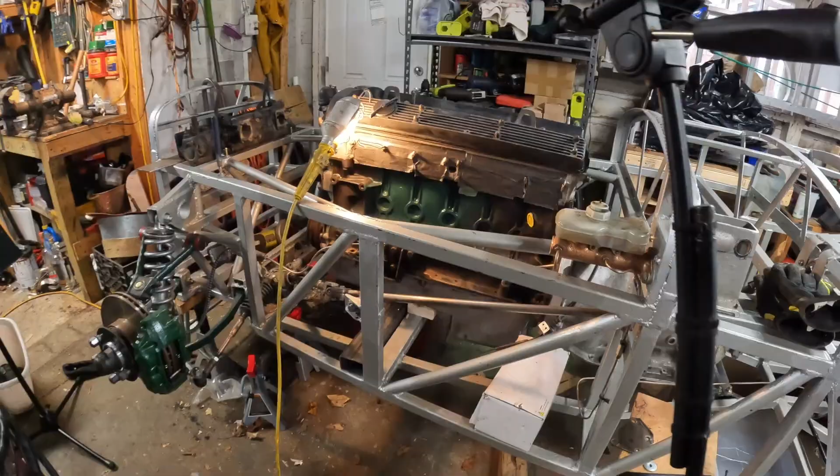What we're doing right now is we're taking a look at the original XJ6 engine mount and the position of the new cross member that's going to go in. As you can see, it's a little loose. Here's the original cross member that I designed in. When I initially put the engine in, the engine mount was directly over this.

Once I put the drive shaft in and realized I could just use that secondary half of the original XJ6 drive shaft without modifying it, being able to use that drive shaft means that the engine mount has been pushed forward approximately 2.5 to 3 inches from here to here. And so what I need to do is add some structure here so that I can build the engine mounts to attach to this.

And so what I'm going to do is effect that by the simple expedient of welding in this fantastic 2x3x120 wall rectangular tube, welded to these tubes here, and then it's going to get welded all the way along the length of the original cross member on the top edge and on the bottom edge down there.

There are some welds that I need to grind down and not only just rub the paint off for welding, but there are some welds I need to flatten out so that that new piece of rectangular tubing will mate flush up against the designed-in cross member, and then also sit square in the corners of the forward tubes as well.

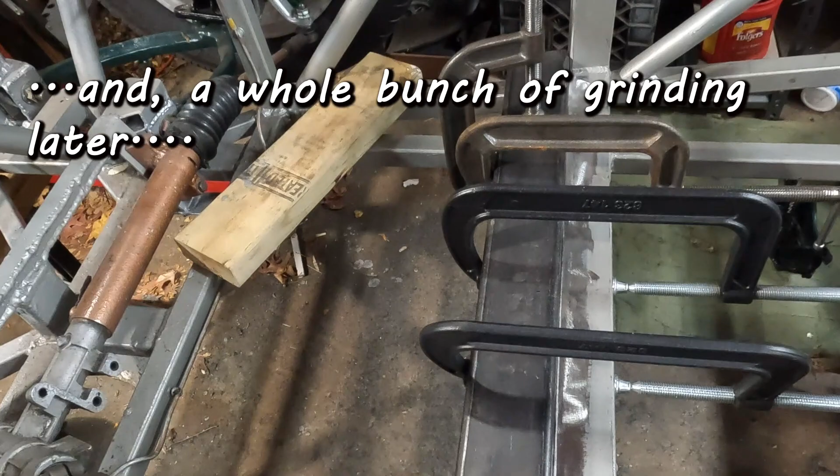As you can now see, the new cross member is clamped in place with all of my most heavy clamps. I beveled the ends to 8 degrees to match the angle of the chassis tube. The new cross member is ready for welding. Let's fire up the welder and make some sparks fly.

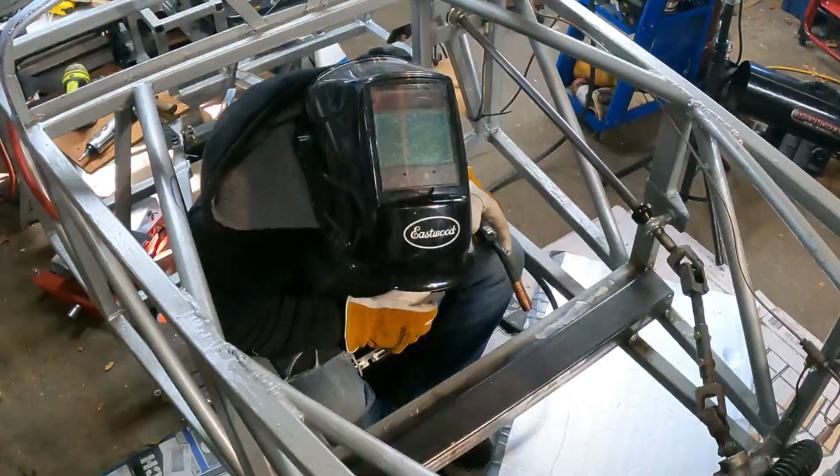Pretty good. So those welds look pretty good. I'm not too upset about them. There's a couple that are kind of blobby and hideous, but good thing they're on the bottom and nobody can see them.

So now I'm ready to move on to the next phase of the project, which is putting the engine and transmission back together with some finishing touches that I didn't do on the first pass when I was just placing it in there, and then build the engine mounts, and that's super exciting. So next phase.

Yeah, remember when I thought that 20 degrees was hardship conditions? It's a little colder than that today. Let's go fire up the jet engine heater and give that garage a warming. So we're out here in the garage. As you've seen, it is really blisteringly cold outside. And I've had the heater running in the garage for about, I want to say, an hour. And so it's not terrible out here. You can still see my breath, so it might be 40 degrees in here, even though it's like 9 degrees outside.

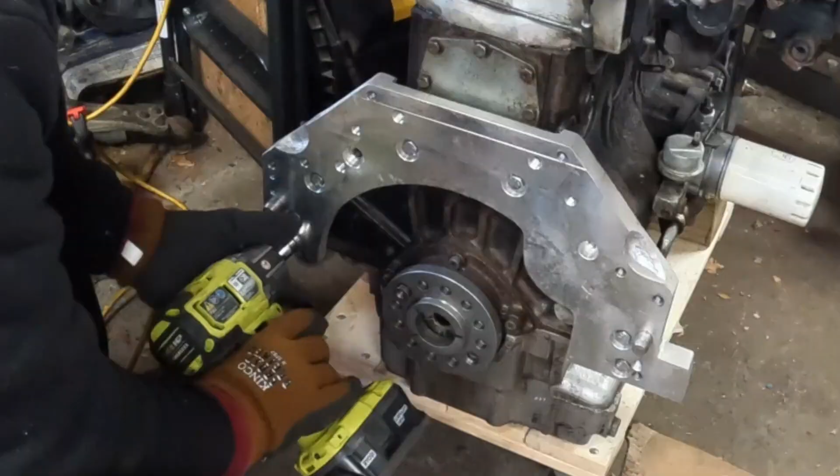But anyway, I have to torque all these fasteners, and you can see that I've taken the flex plate off because I want to clean out the threads, stick some blue Loctite in there, and then torque those to spec as well. So the first thing that I got to do is pull these bolts out. And clean out the threads. Apply some blue Loctite. And torque them into place.

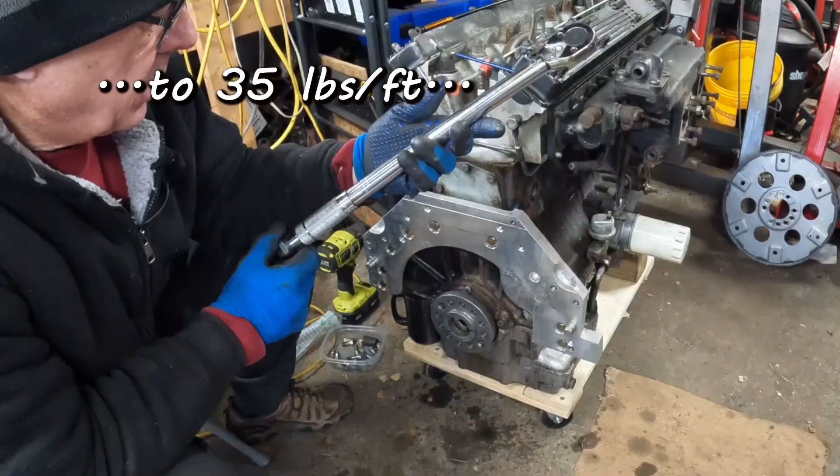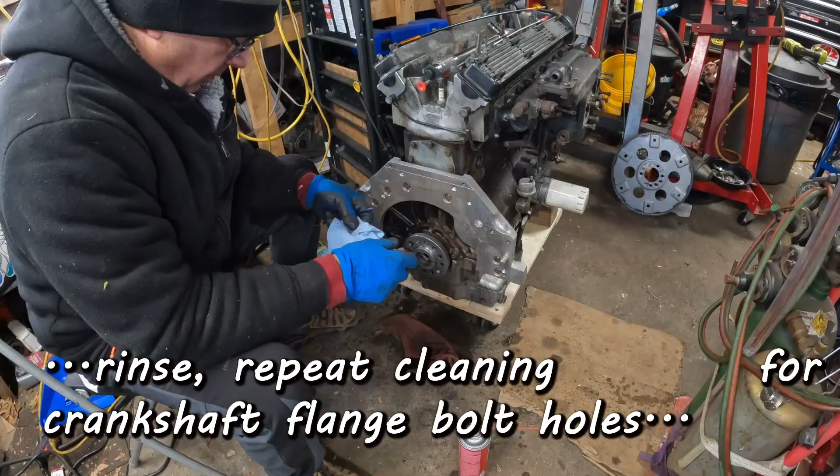There we go. Cool. All right, so the adapter plate is mounted in its final configuration. Right on. So the first thing that we got to put in, where did I put it? Oh, here it is. This right here is a locating dowel that went through the stock Jaguar flex plate into the crankshaft flange. And here on the John's adapter, there are two holes where these things go.

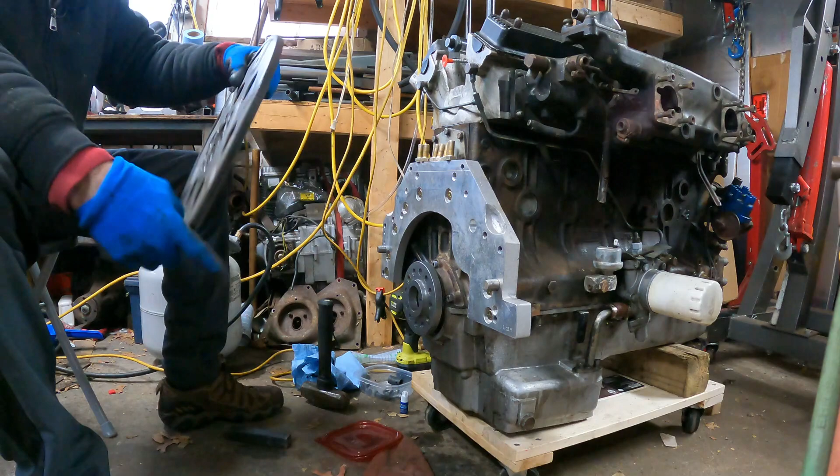One is right here. And here is the other dowel, which we're going to tap into the hole. There. Now the thing is, this thing is a bit of an interference fit. Flush-ish. Okay, so now you go on here, like so. There we go. Looks good.

The star lock washers. I know, why am I using both lock washers and blue Loctite? Because this is the flex plate attachment. I do not want it to come undone. We're just going to gently roll these in.

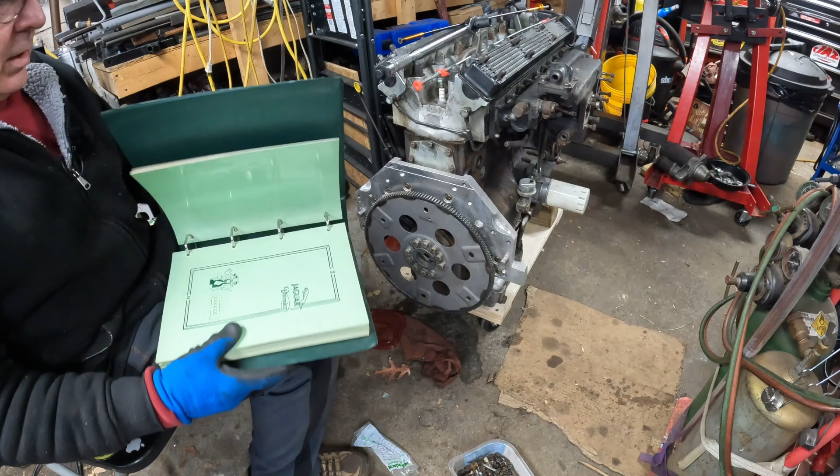Borg Warner BW66. Flywheel, 7/16, 63.4 to 66. So if we set this thing to 65 foot-pounds, we are golden. 65.

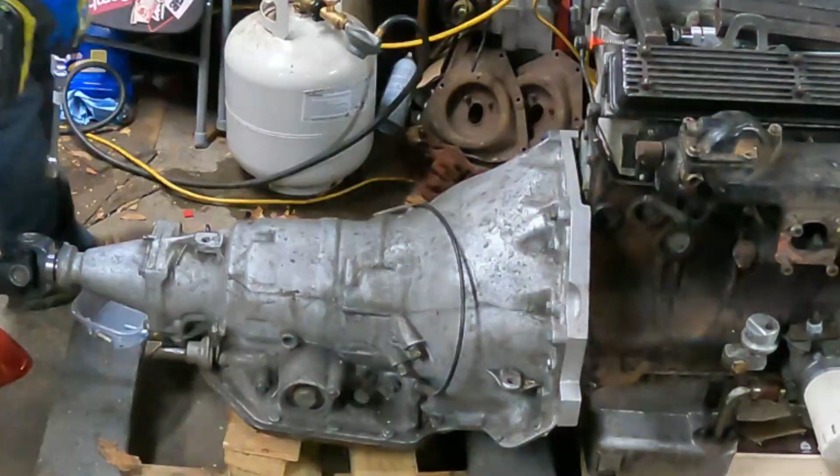So I put that flex plate on there. Let's plug this transmission back onto the engine as best we can. Yeah. Both dowels are on. Nice. There we go. Cool. Time for the magic trick.

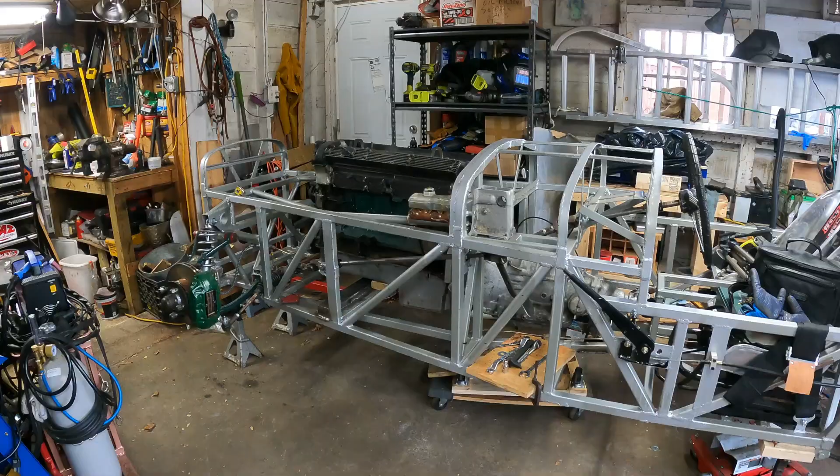Right here, this is the stock XJ6 engine mount, bolted to the engine, obviously. Let's come down here so you can see it in a little better view. As you can see, well, it's a little hard to see, I think. There are 3 bolts, 1, 2, 3, and then let's come around here like so, and you can see that the base plate on this mount is angled.

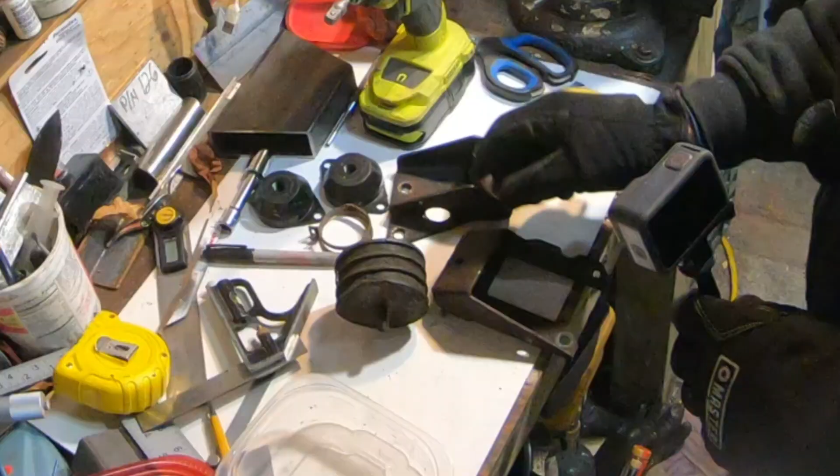And in the stock configuration, this would have mounted to a big rubber isolator and then a bracket that attached to the engine cross member in the XJ6. In fact, let's come over here and I'll show you those pieces. So you would have this chassis bracket, the engine isolator goes into the chassis bracket, and then the motor mount attaches to the chassis bracket like so.

This isolator is old and beat, and in fact is softer than I want the engine mount to be. So rather than using this XJ6 engine mounting system, these are Series 1 Jaguar XKE engine mounts.

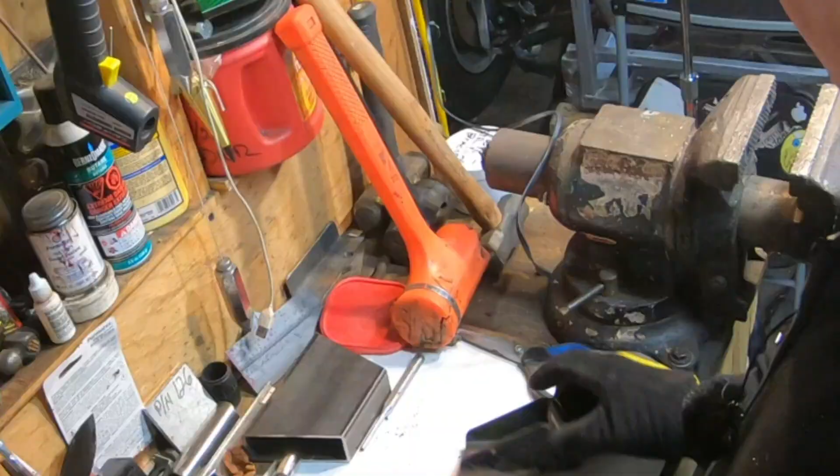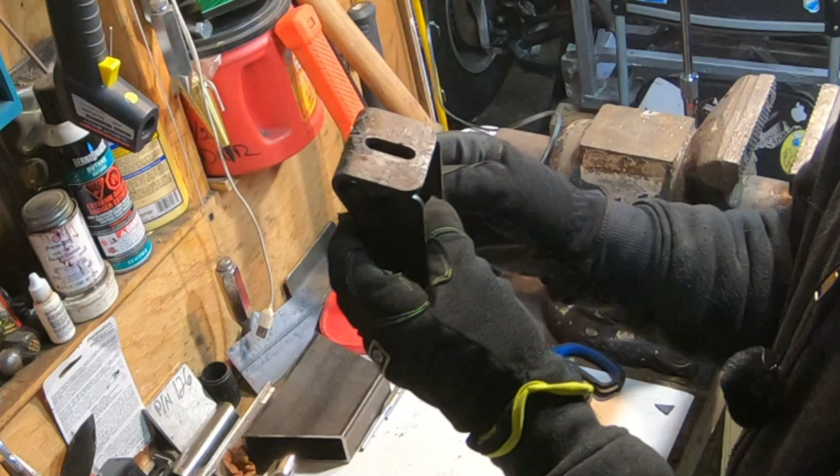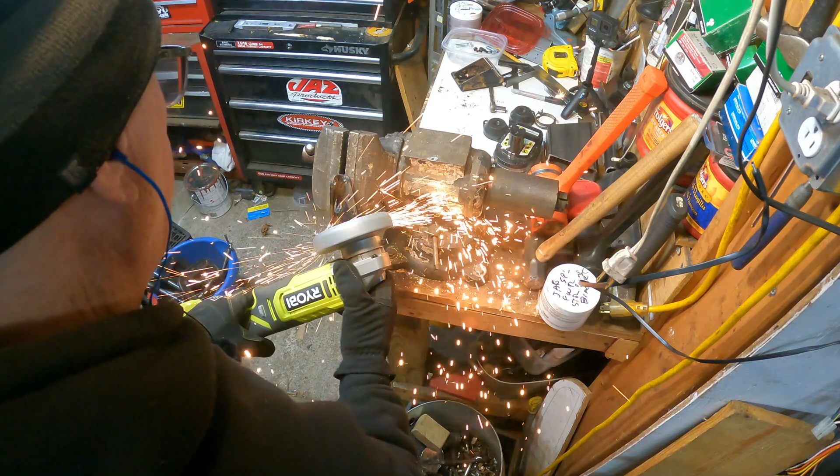And so what I'm going to do is I'm going to take these XJ6 engine mounts, cut these welds right here, one there and one there, heat this edge, bend this to a 90-degree angle, like so, and then add some plates to weld it. These guys will then mount like so. There's that. There we go.

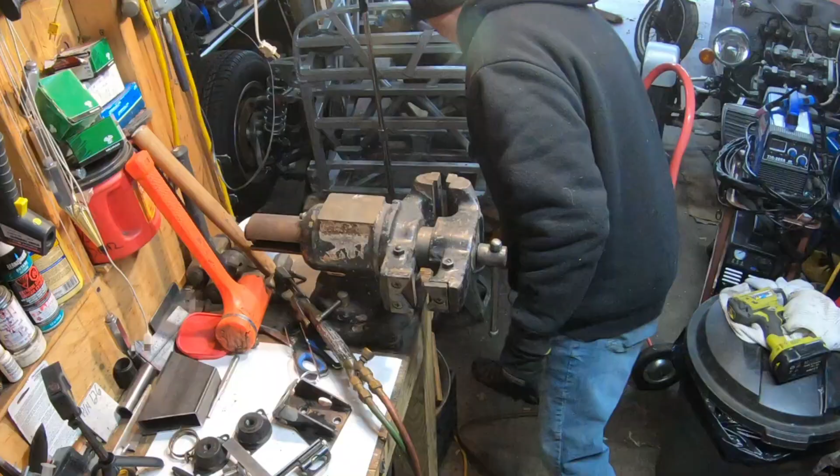Robb's calibrated eyeball says TLAR. Pick it up with the hot stuff glove. Put it on the cold concrete floor. Rinse, repeat for number 2.

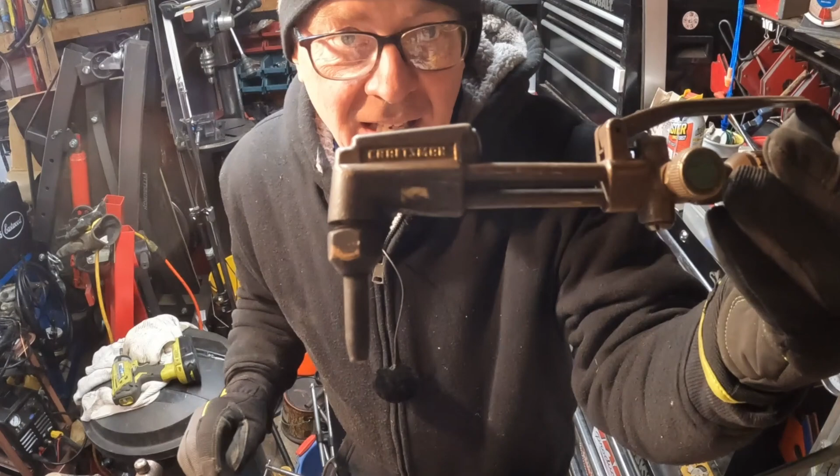Just so that everybody watching this channel understands, I am a craftsman. It says so on my tools.

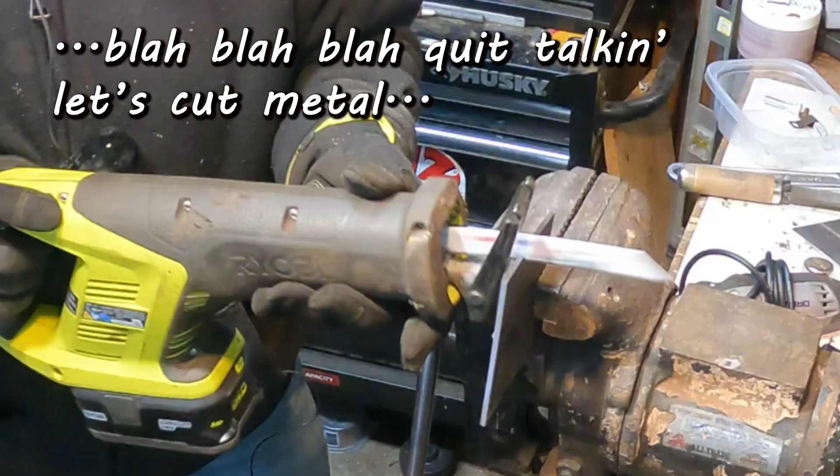Okay, so we went over to the scrap pile and we got a piece of scrap tubing wall that was actually used for the transmission mount. What we've done is we've sketched out a shape that is going to go right about here. All right, so, welding.

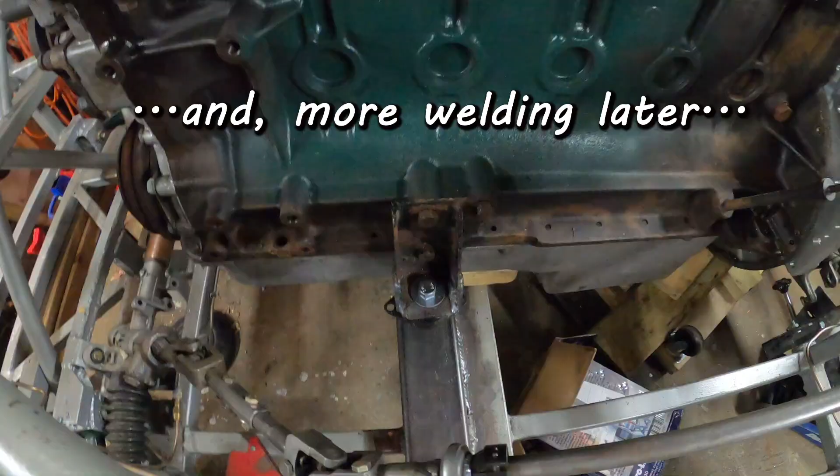Yeah, there we go. Melty goodness. There it is. See? Looks pretty good. Down you go. More welding. Well, there it is right there.

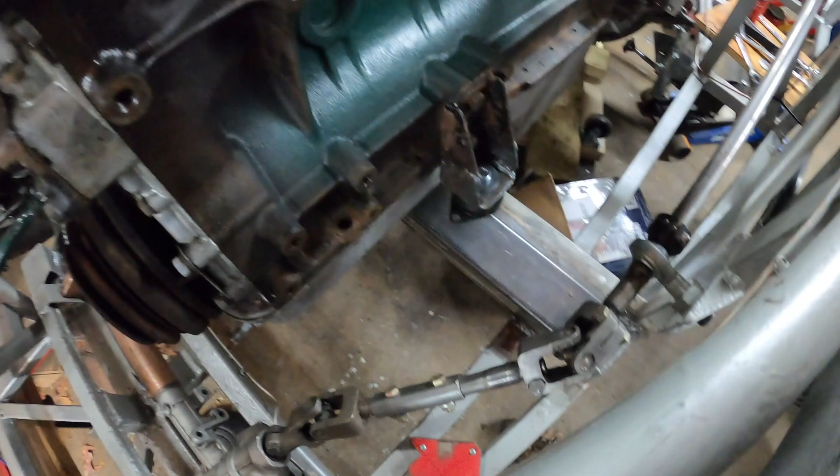The product of today's efforts, the modified Jaguar XJ6 engine mount with the Series 1 XKE engine isolator attached to the bottom. All I have to do now is figure out the attachment from the new engine crossmember to the isolator, and that shouldn't be too bad.

But that's for tomorrow because, as you can see behind me, it's pretty dark outside. It's time to head in and have some dinner. Cool. So yeah, a productive day. And another afternoon or two, and this engine's going to be bolted right into the chassis.

Yeah, good times. So a week ago, you saw that it was 3 degrees on my dashboard thermometer, and I had the heater blasting because it was freezing out, in order to get the garage up to a workable 40 degrees or so. A week later, it's 60 degrees. And the likelihood is very high that I'm going to take that thing for a ride today. Maybe both of them, because it's beautiful out.

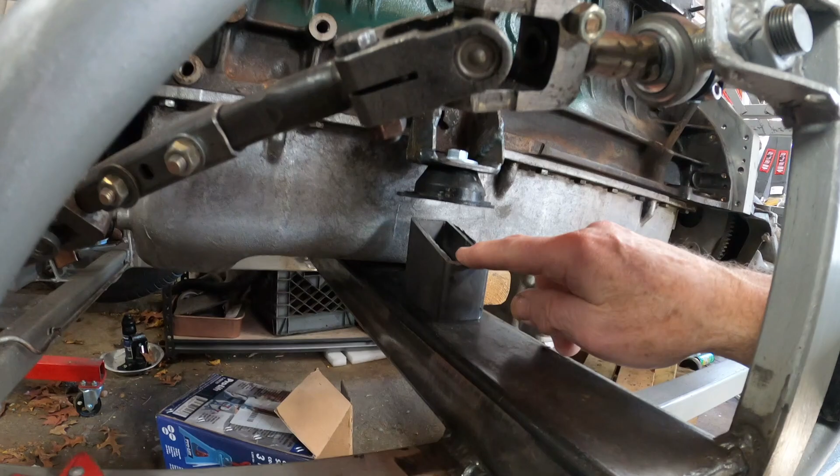But, be that as it may, as I backlight myself with that beautiful sun, what we're doing today is we're creating the attachment for the XKE engine isolator to the crossmember on the chassis. Let's fire up a couple more cameras, take some measurements, and then get on with some fabricating.

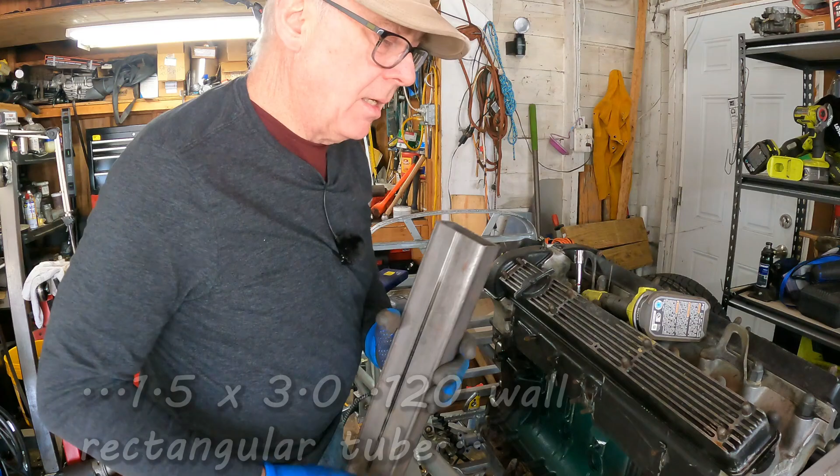So what we're doing right now is I have some material selected for this mount. The main mount is going to be made out of this 1.5 by 3 by 0.120 wall tubing. What I'm going to do is align the back side of the tube with the back side of the XKE engine mount, center it under the engine mount, and then weld a plate across the top that has the 2 bolt holes in it, so I have access to the fasteners on the bottom.

And then this will obviously get welded to the cross member, and then I'm going to gusset it, probably a tube gusset from the middle of that down to here, so that it will be extra strong. I've got to measure the distance from the XKE engine isolator to the cross member. Let's see how long this tube needs to be.

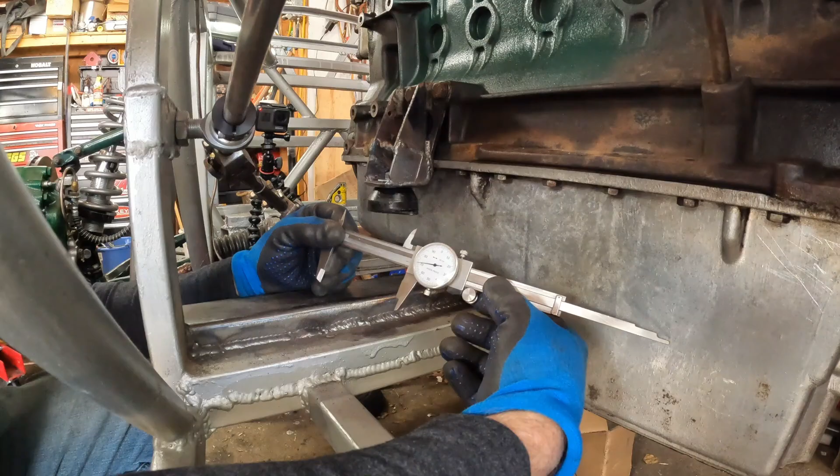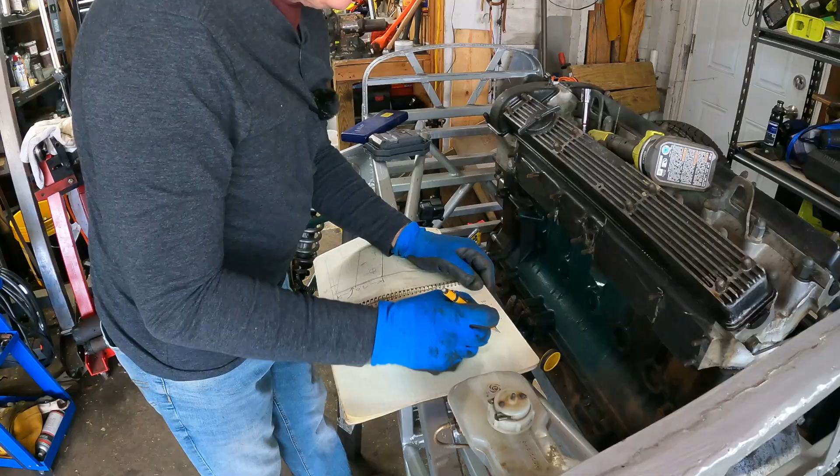And that, my friends, is, oh, look at that, will you? It's 3.27 inches. Let's go get the design notebook and write that down. So the material is going to be 1.5 by 3 by 0.120 wall, rectangular, and the length,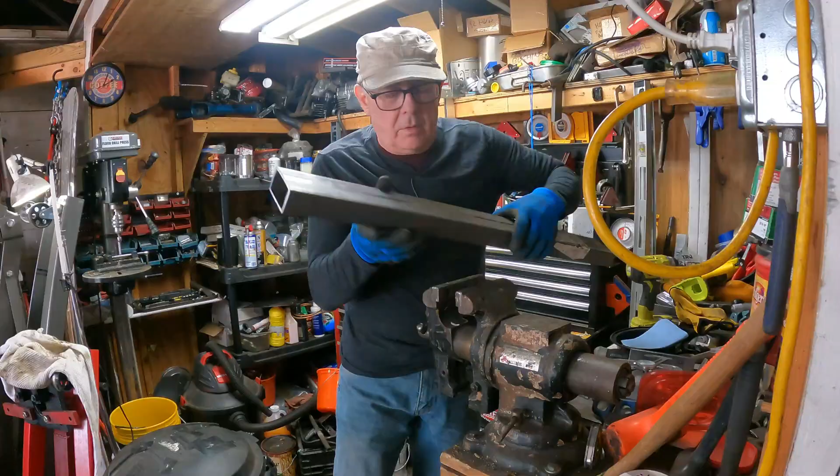3.27 total. So we're going to put a 1/8 inch plate, so 3.270 minus 0.125, yeah, boom, 10 minus 5 is 5, 6 minus 2 is 4, 2 minus 1 is 1, 3.145, okay. We'll round it to 3.15 because that'll just make life easy for me. Good, okay. So let's chop a couple pieces of tube, shall we?

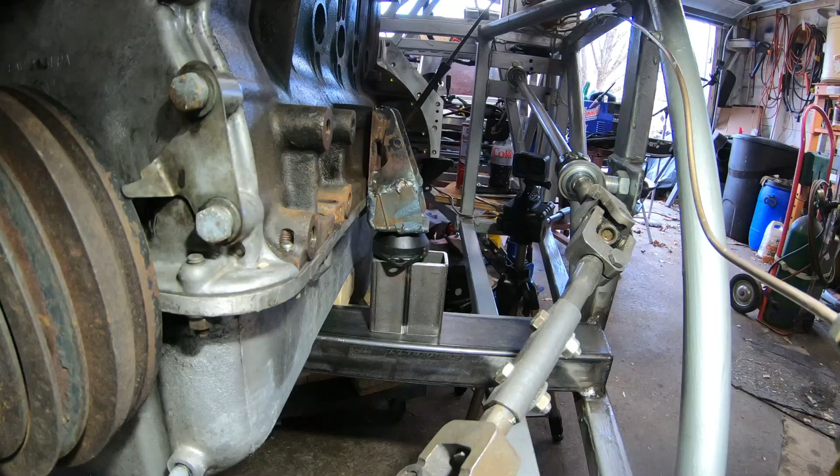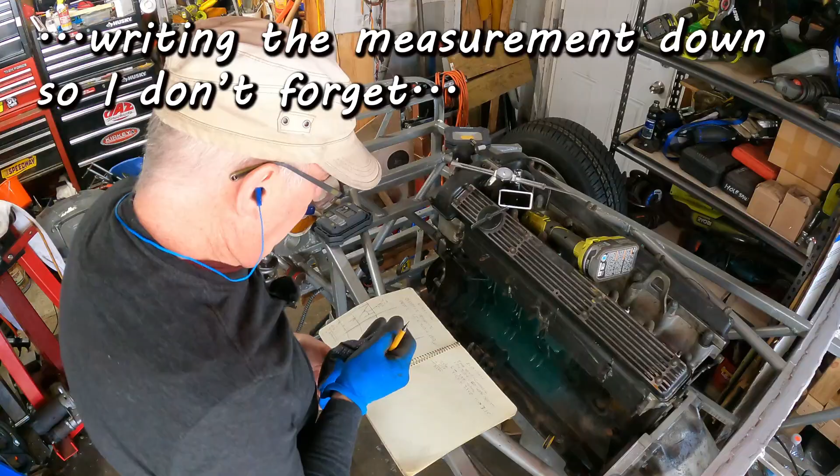Looks about right. Yes, it does. My calibrated eyeball says that there's 1/8 of an inch. We need a piece of 1/8 inch plate that will be 3.55 long. Cool. Okay, the tube's 3.15.

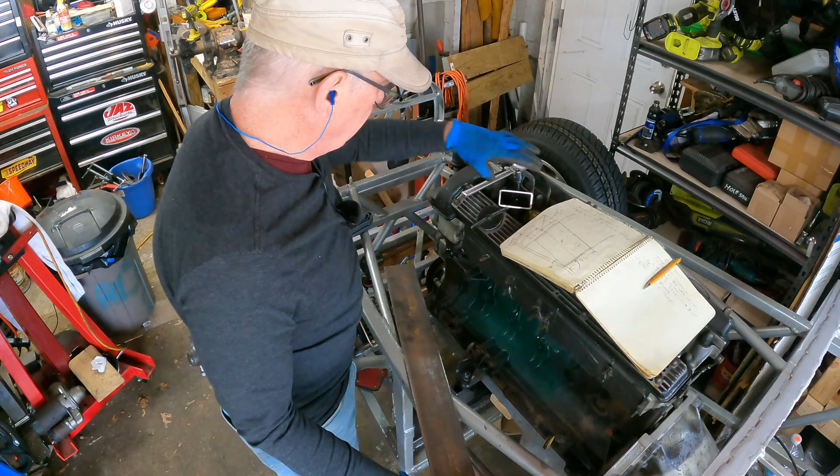Let's see, top plate. 3 by 3.55. Here we have our 3. Bump. And then it's going to be 3.55. Let's go mark a couple pieces and chop these off too.

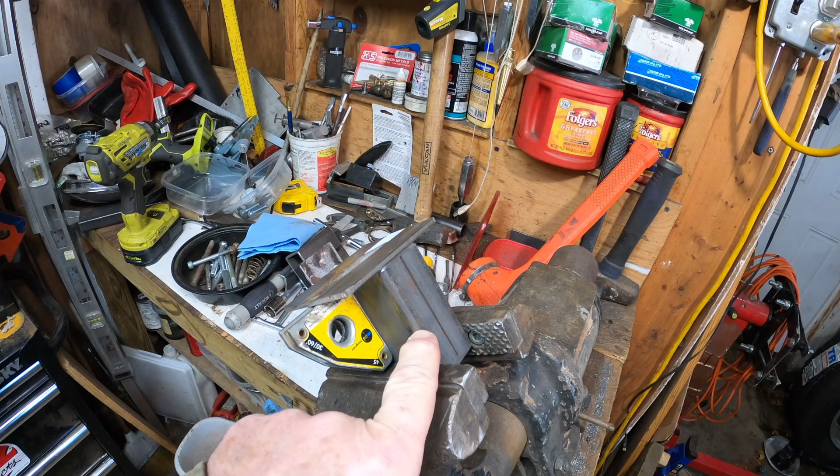All right, so here we've got the post that I cut to the correct height, 3.15 inches height. Here we have our 3 by 3.55 plate. And what I'm going to do now is weld the plate onto the tube. To get it centered, I marked a center line on the tube on both sides. It's a little hard to see, but there's a center line right there as well.

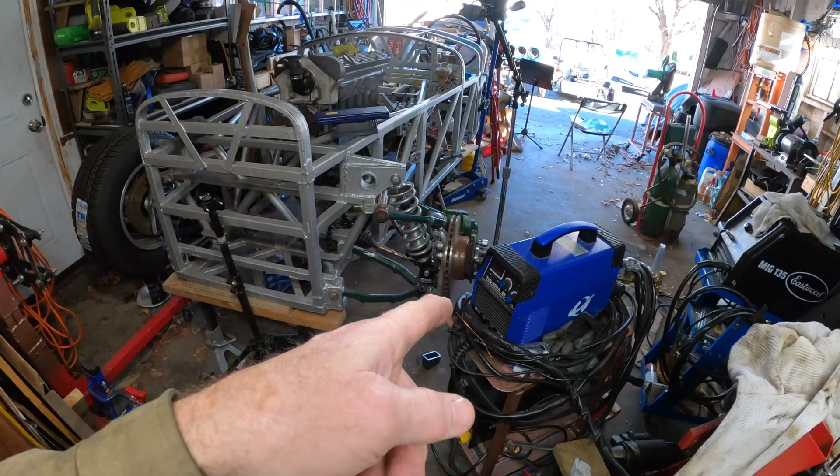And then marked a center line down the plate, aligned all 3 of those, got one of my small welding magnets, and then just another random magnet on the other side. I think that this will be a good opportunity for me to practice some TIG welding. So yeah, let's fire up the TIG welder, and it doesn't make sparks fly, but it is a whole lot of fun to use. See if I can keep from getting the tungsten into the weld pool again.

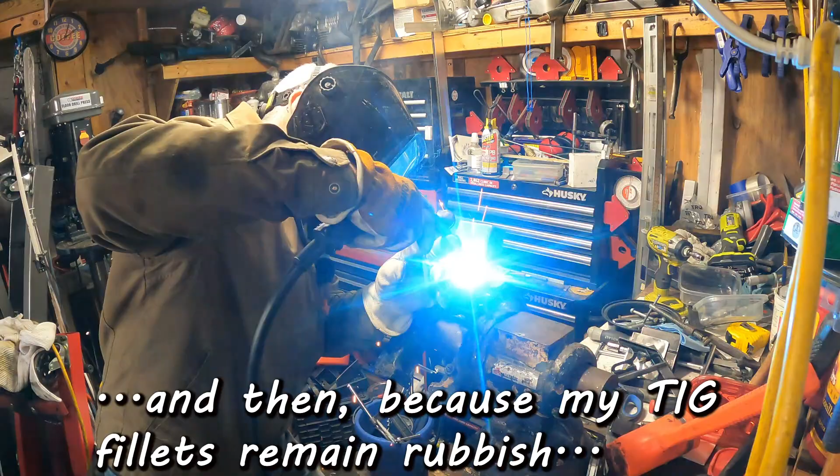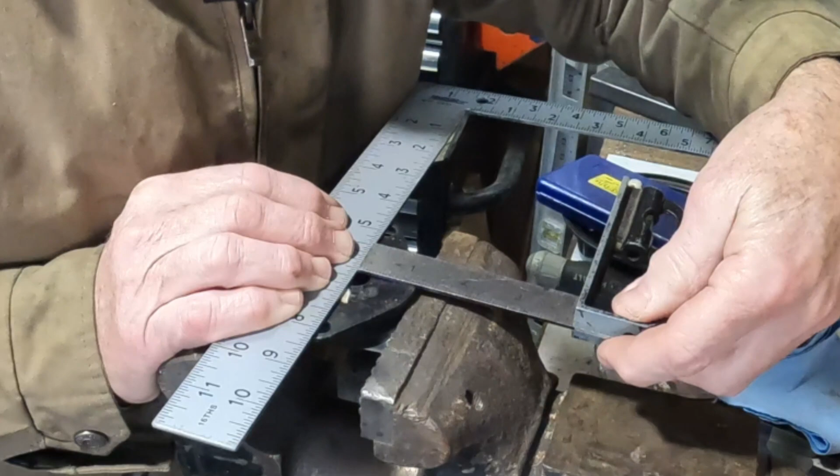Okay, we're eyeballing the center line of those holes, and I want to say that that's 1 1/8. Cool. So we will make it 1 3/16. 1 3/16 right there. Yep. And then 1 3/16 right here. 1 3/16 right there. And then, oh, this one actually is sort of square.

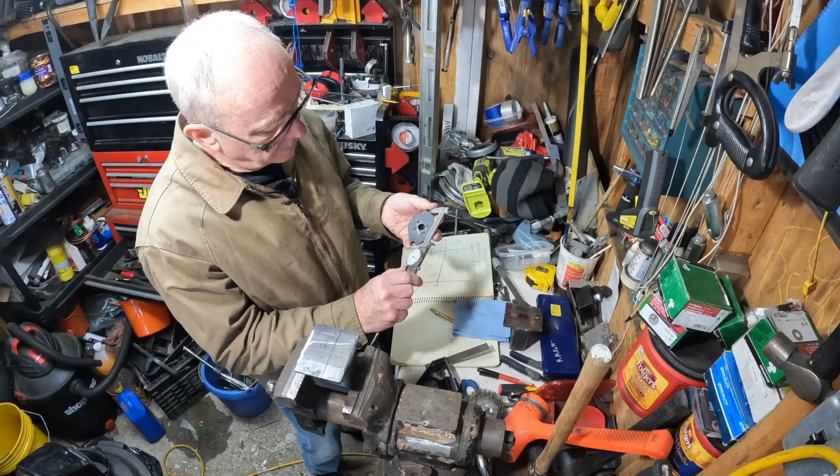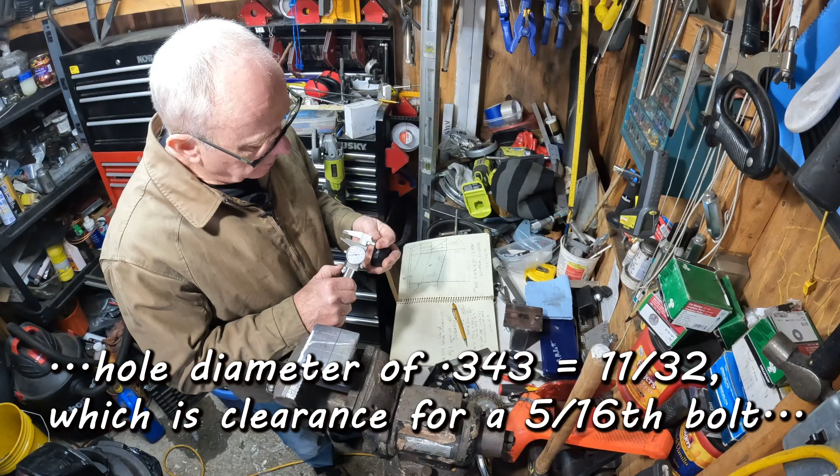There we go. The isolator holes are on 3-inch centers. There's 3 inches, measuring to the outside edge of each hole. Let's check that against the 3-inch centers. And the holes are 0.34, which is probably 0.343, because that is a fractional size. Yeah, 343. Okay. So if they're on 3-inch centers, what I can do is from this center line right here,

I can go 1.5. There's that. Then also that. Three clicks, because we like that. Also 3 clicks, because we like that. And we do the calibrated eyeball test. Passes the calibrated eyeball test. Oh yeah. Next.

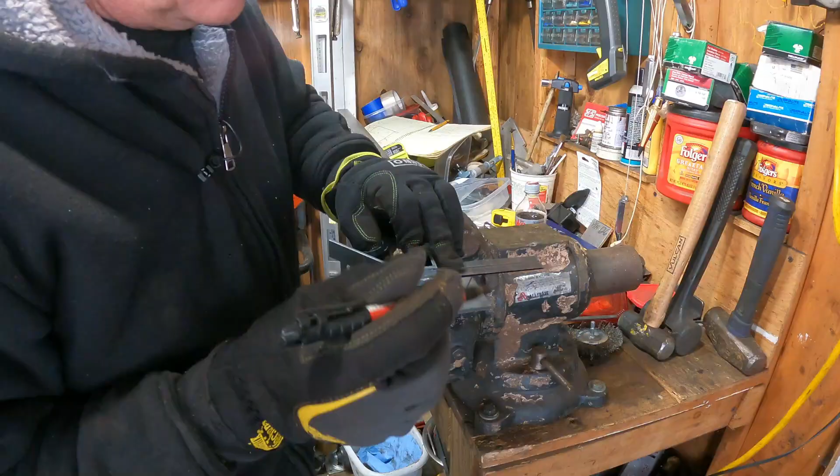Yep, that looks good. And then we're doing the old measure twice, cut not more than twice. I am going to do my best Allen Millyard impression right now. Tough one to start, so we'll do this first.

All things considered. The metamorphosis revealed. You've changed me, says the steel. That's in a song that I wrote.

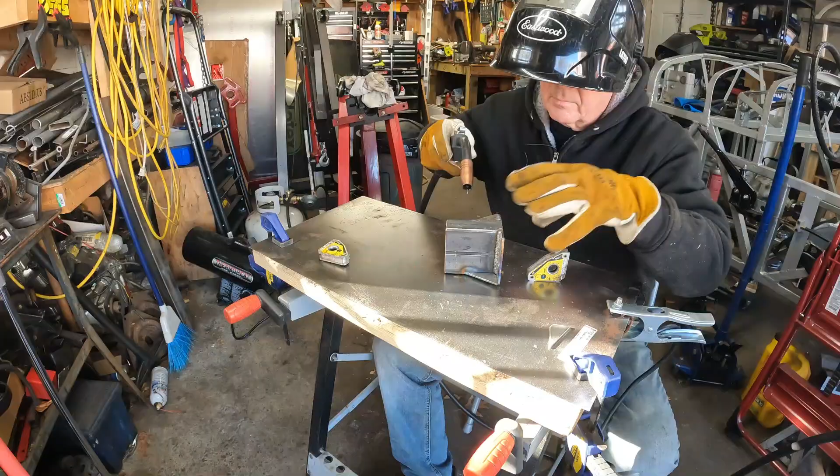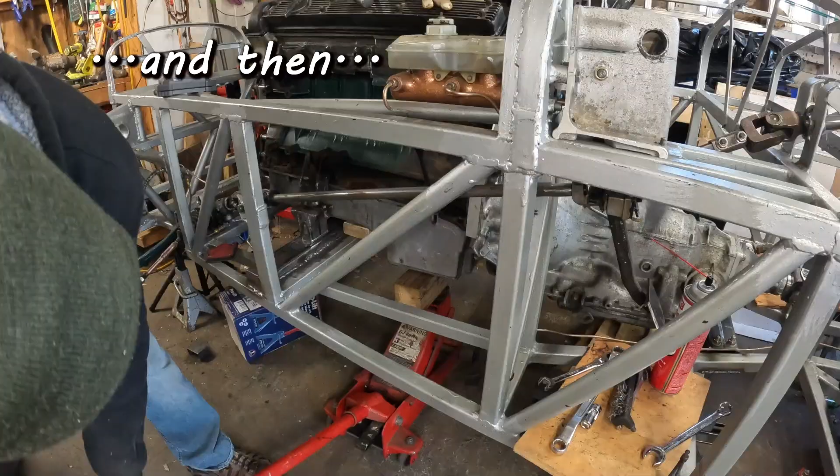Okay. Down onto the cold, cold concrete with you. Next. There we go. Boom.

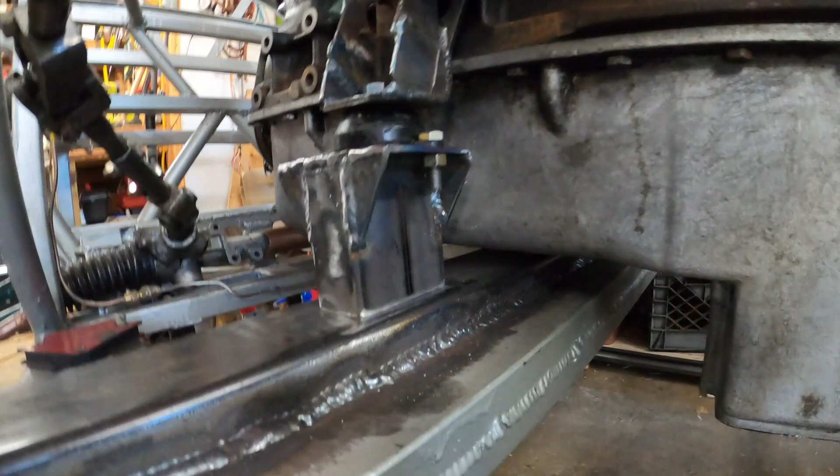A significant milestone has been achieved. No more wooden blocks under the engine. It is now sitting on the engine mount pedestals. As you can see, they're not welded in yet, but the engine is now in the chassis on its mounts. Let's fire up the welder and tack those things in there.

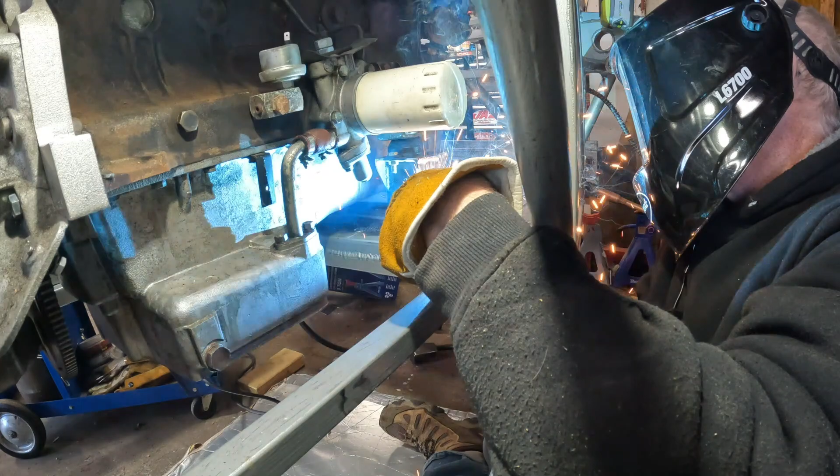There we go. Ooh, we're down in the murky depths. Hello. Oi, potatoes. Whose idea was this?

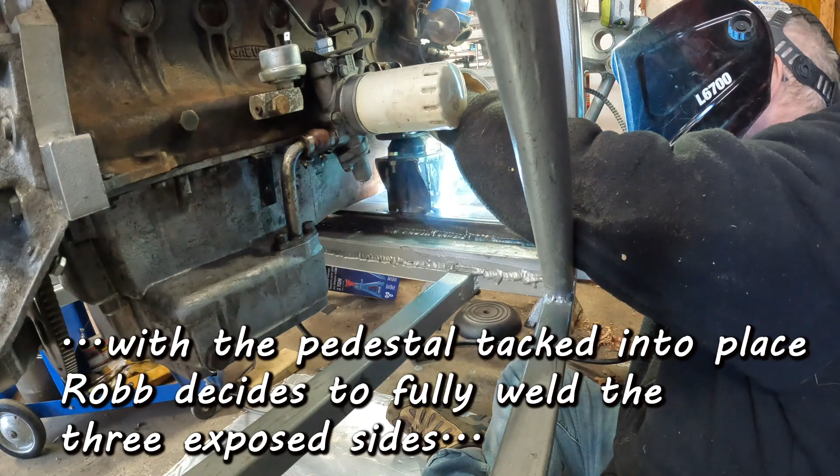Well, the front side of this is welded. Let's weld the back side. Why not? What could possibly go wrong? Cool, man. Well, this motor mount is welded in. Let's go do the other side. Well, at least that much of the other side.

Today we got another significant milestone. You saw that I had taken the wood block out, and I did actually weld the engine mount, the parts that I'm calling now the engine mount pedestals, in on three sides. And there's the driver's side right there. Nicely welded. It's still a little warm. The engine has to come out again for the second time so that I can weld on the inside. Weld on the insides. Ooh, that's hot.

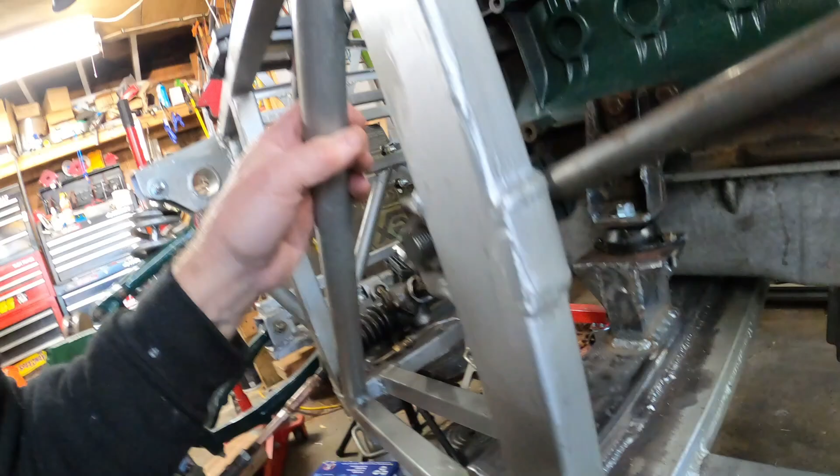Weld on the insides. And then make the gusset that's going to go from the back of the mount down to here. And then the engine will go back in for the third time so that I can figure some stuff out. The episode won't be done until I've taken the engine out and done the finish welding and then put the engine back in. And then I'll talk some more about what I'm talking about right now. Maybe. I don't know. We'll see.

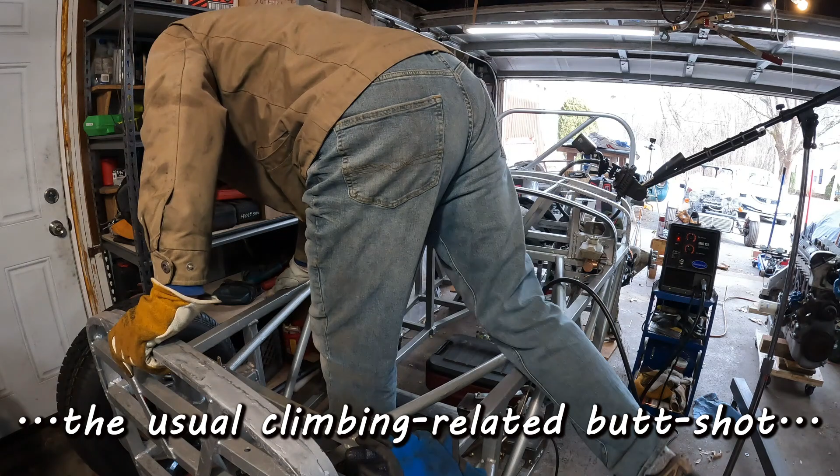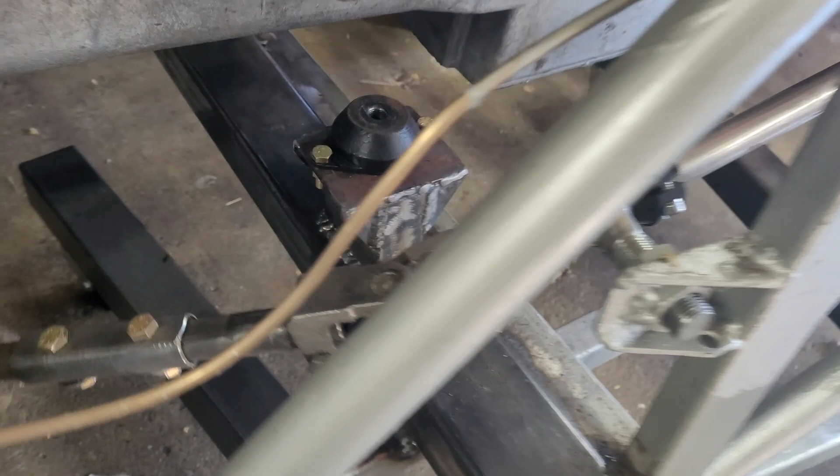Yep, there we go. Oops. In the interest of full disclosure, here I am pulling the engine out again for the third time. You didn't see me put it back in. You did see me take it out for the second time. But I put it back in because I wasn't quite sure what I wanted to do with the engine mount pedestal bracing. But I have since figured it out.

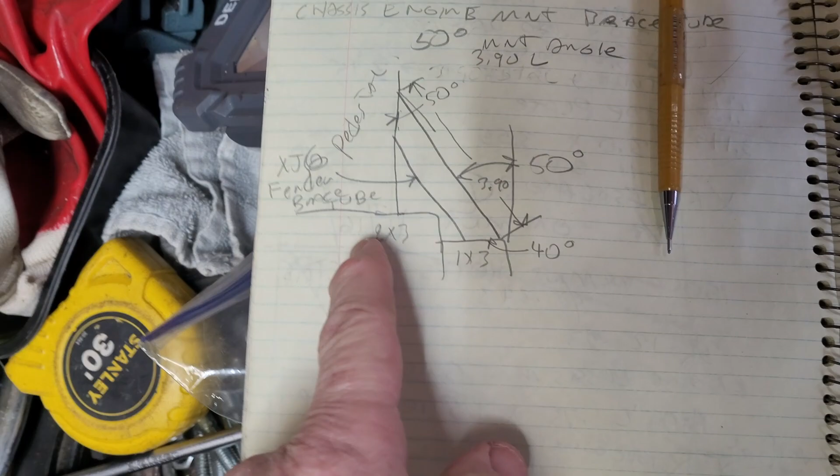You'll notice that here I have, sitting in my vise, a piece of the Jaguar XJ6 donor fender bracing that got used for creating the crush tubes in the transmission mount. But what we're going to do now is take another piece of that and make a bracing tube that's going to go from the original cross member over the new 2x3 cross member to the pedestal.

It's going to be mounted at 50 degrees and it's going to be 3.9 inches long. And so I got some more work to do to get that engine out, and then we'll get on with fabricating those engine mount pedestal bracing tubes. Cool.

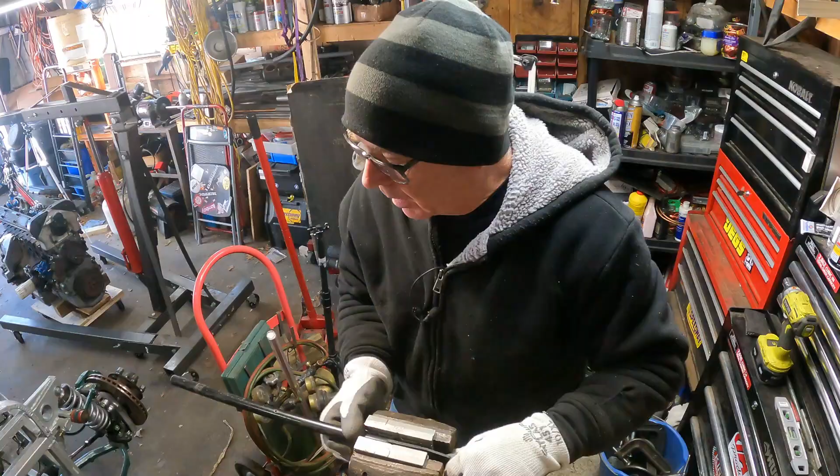I've got my piece of XJ6 donor fender strut here in the vise. Level this out a little bit, make life easy for myself. And that's not level. There we go, it is now. Is it? Is it actually level? There we go, good.

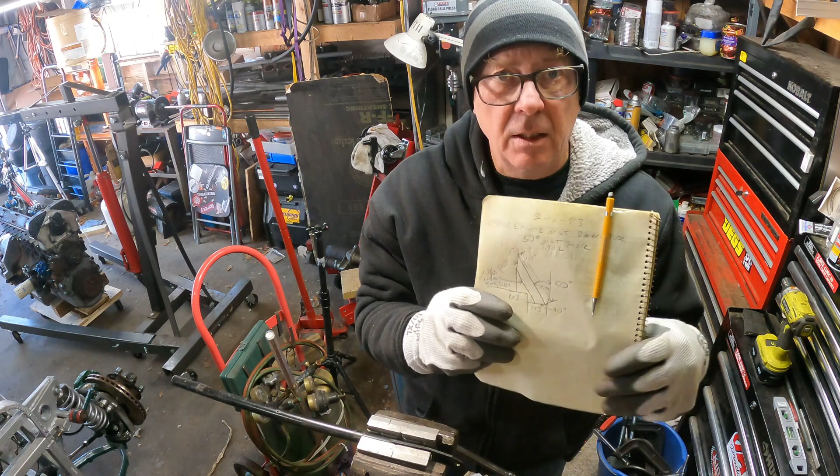What I'm gonna do today is cut two pieces of this so that they match the dimensions in this sketch that I've done right here. There are two different angles that need to get cut, a 50-degree angle and a 40-degree angle. And having done those kinds of separately cut miters before on round tubing, one of the things that's hard to do is to make sure that both of those cuts are aligned to the same axis that would go between the plane of each cut. Like here's the 40-degree cut, here's the 50-degree cut.

If you're trying to just eyeball the cut to be vertical, it's really easy to get that wrong. And so you wind up with two cuts that aren't exactly planar. They're like twisted from one another. But there is a methodology by which you can alleviate that problem. And so what you do is you take your combination square, little combo square, and then here I have a level. And you saw me level this out.

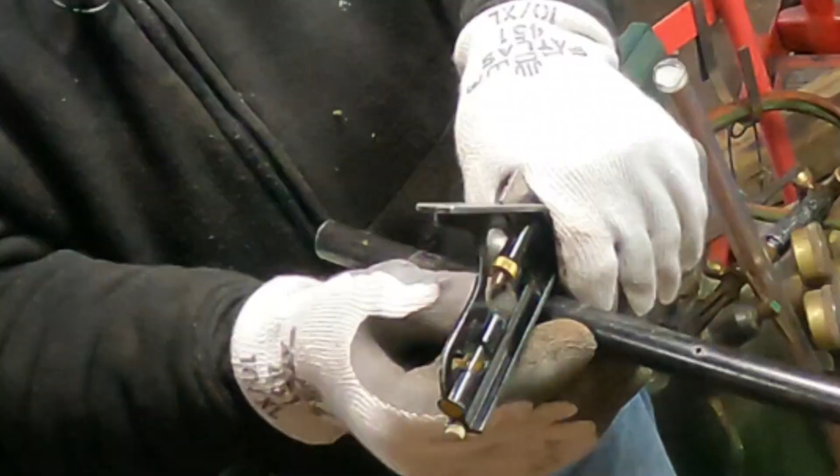And so what I'm going to do is take my level, make sure that the bubble's in the level, and then scrape the ruler carefully along the side of the tube, like so. Keeping that bubble in between its alignment marks. And when I do it that way, I wind up with a scribed line on the side of the tube. So I set it in the chop saw, I cut one to 40 degrees, put it back in the chop saw, and I can measure this against the backing plate for the clamp. So I've scribed my line.

Let's go set the chop saw to 40 degrees and cut ourselves a couple pieces of tubing. You can see that right there, there's my line that I scribed a moment ago. And so I happen to know that this piece of tubing is 3/4 of an inch wide. So what I want to do is set that line to 3/8 of an inch, tighten the clamp, and then plug in the chop saw and cut it off.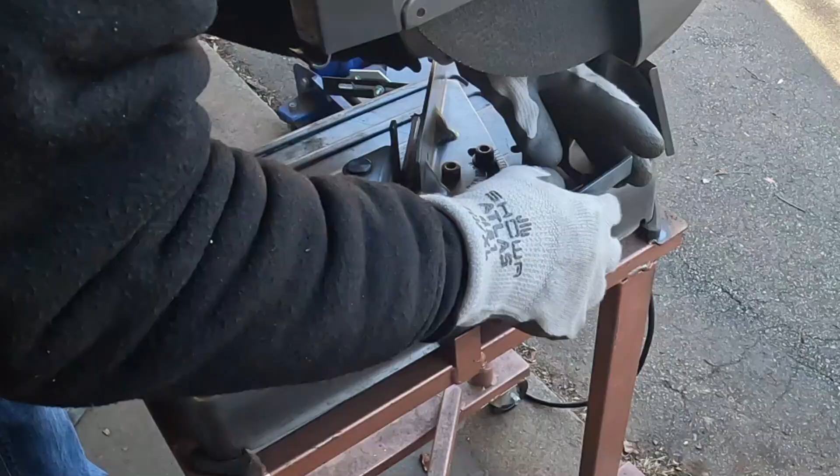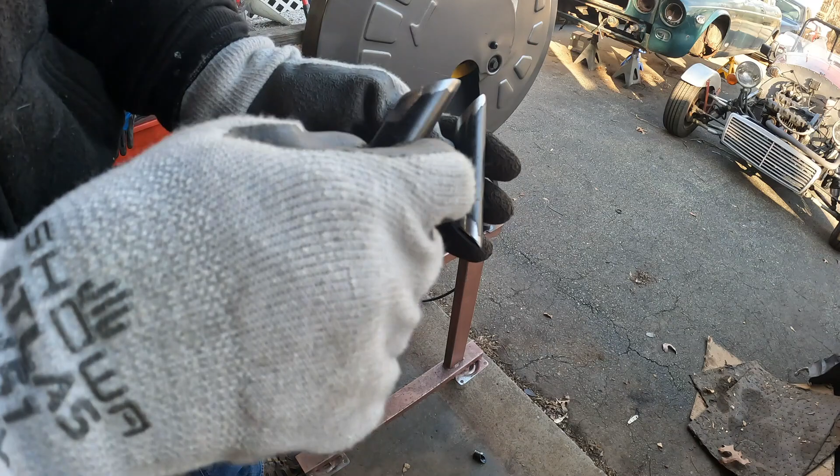And there they are. The engine mount pedestal tube braces, cut to length and cut to angle at 50 degrees and 40 degrees. Uno, dos. Cool. Let's go fire up the welder. Okay, so here we are.

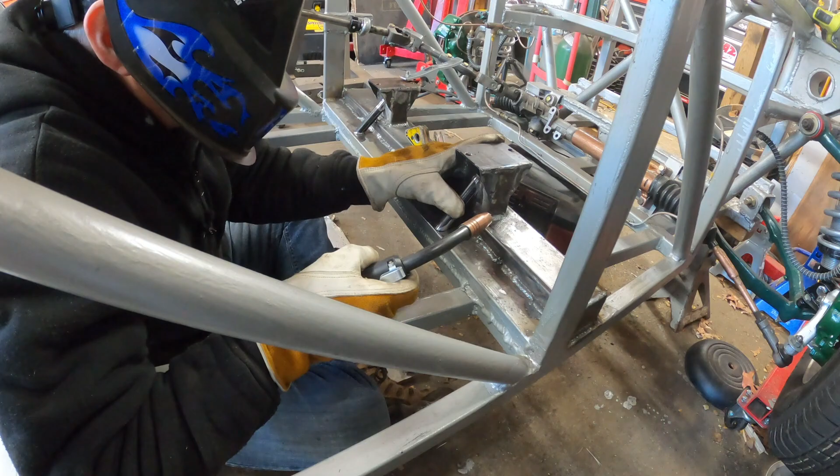Hello, everyone. Let's see, bring this guy underneath, like so. We'll do this one first. We're going to press it into place and tack it. At the top. Yep, this one's a little crooked. Don't care! Off we go. Yep.

Hey, you. I pronounce those welded in. I pronounce the pedestals braced. Yay, successfully. They need to be wire brushed, they need to be painted, but everything is looking good. Oh well, let's climb out of here, shut things off, and then, like I said, put the engine back in. This will be number 4. Oh, I'm getting close to that 5, aren't I?

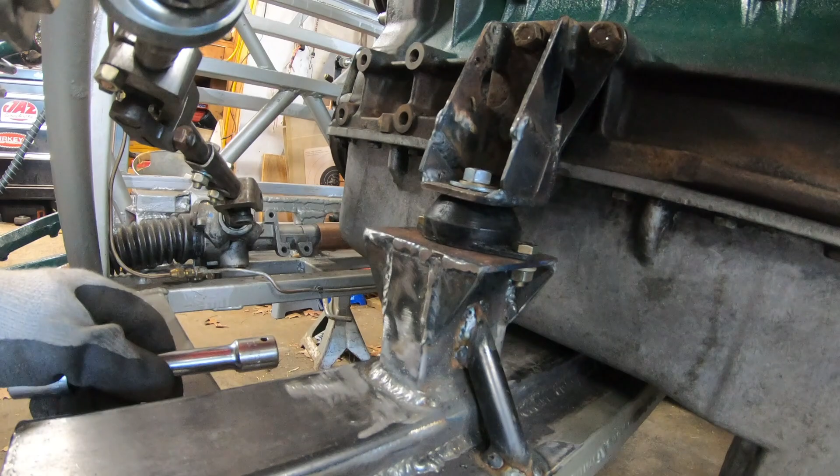There we go. So, the engine, my friends, is bolted right in. There you see the pedestal mount, the XKE isolator, the modified XJ6 engine mount bracket, and the infamous and ever wonderful bracing tube. So I pronounce these engine mounts complete, and as I am so fond of saying, that engine ain't going anywhere.

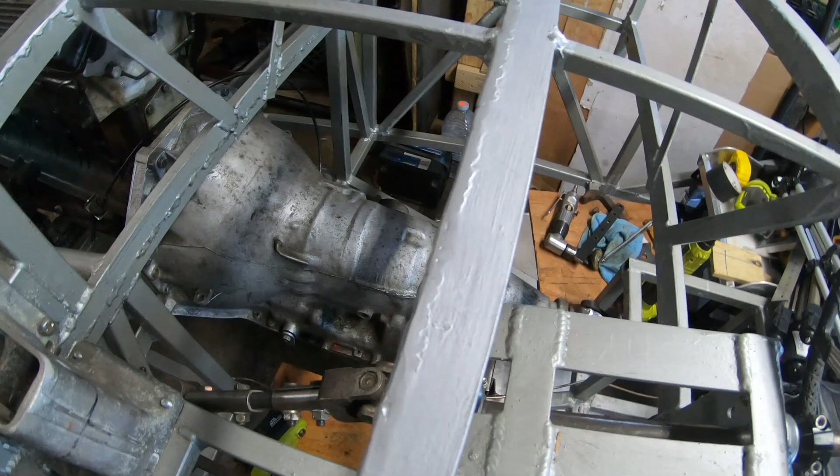And so now I'm going to move on to the next part of the project, and the next part of the project is the transmission tunnel. There is, as you can see, a structural void from the drive shaft tunnel all the way up to the firewall, and that's what needs to get completed now. And that's going to take a bit of thinking and a bit of fabrication and a bit of scratching my head and sketching in the notebook. But you're going to get to see all of that here, even the boring parts.

So anyway, the engine's in, the transmission mount is done, the engine mounts are done. I hope you enjoyed this little adventure.